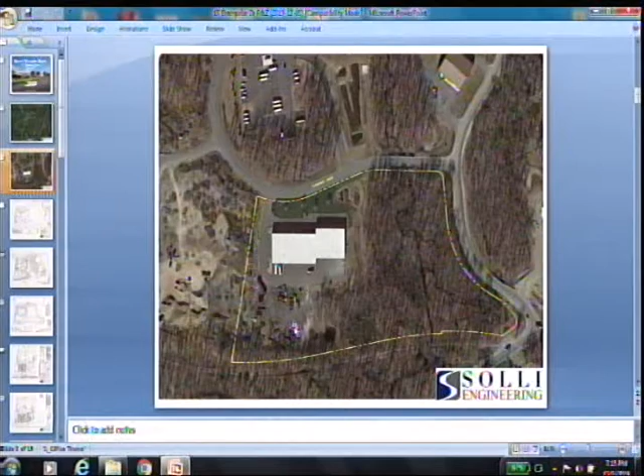This was the approved phase 1 site plan. What happened was that in 2006, the applicant never acquired a CO. So we went through this past year, past 6 months, tying up some loose ends left over from the original approval so that they can get a zoning permit and get a CO. We just completed that process, and the paperwork for the CO is going through town departments.

This was the approved plan from 2006. This is the original phase 1 building, and this is the phase 2 building shown back here. The parcel is 12.3 acres, and of that 5.1 are wetlands in this area. There's a conservation easement across the back.

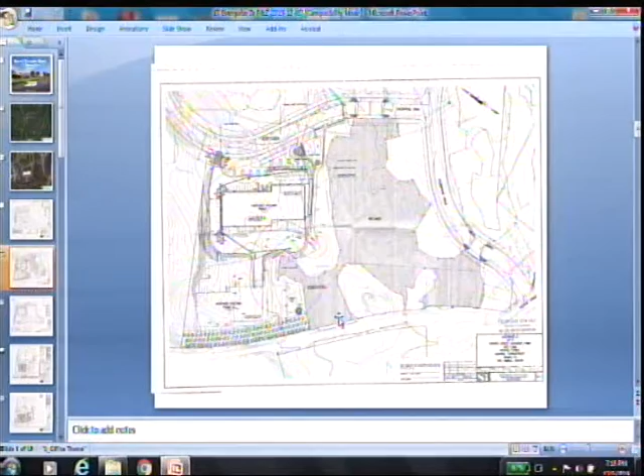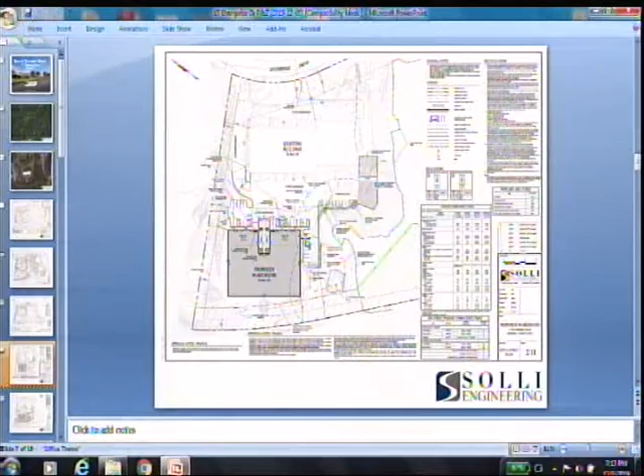This is our site survey, and this is our proposed site plan. It's a 28,440 square foot warehouse building. We're proposing 35 new parking spaces along the front and along the side. There are 2 truck loading bays in the front, depressed loading bays with a 4-foot lift at the end.

There's a proposed detention basin in this area with a retaining wall across the parking lot. Utilities will be stubbed in during phase 1 and tied in to the side of the building. There's a proposed outdoor storage area. The owner is allowed 20% of the square footage as outdoor storage, so he's allowed 6,000 square feet, and we're proposing 5,738 square feet. There's a dumpster for both buildings proposed in this area.

Since our original submission, at the time we submitted initially, we were in wetland review. We had a simultaneous wetland application, which we received subsequent approval on, on November 13th. Going through that approval, there were a number of different things that needed to change, fairly minor things changed as a result of the wetland permit.

Since the original submission, initially this outdoor storage area was not shown, it's been added. We had initially shown 7 parking spaces along the edge of this parking here. We've changed that to 8 because we made an error showing the parking required for the phase 1 building, so we needed 1 more parking space and added it here. We also added a location for a proposed monument sign in the front.

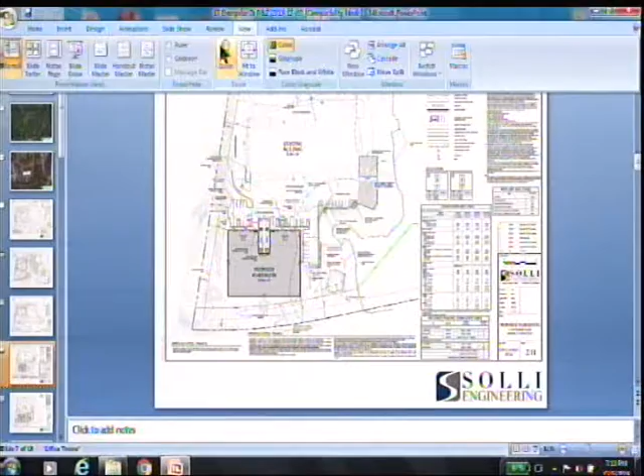We reversed the configuration of the accessible parking spaces in front of the building so that the space was not adjacent to a loading space. This is a loading dock, so it ramps down and is 4 feet below the first floor for a semi-truck. These are surface loading spaces with a roll-up door on the side for something like a van that can back in and unload directly to the first floor. We reversed the configuration of the accessible parking so it wasn't directly adjacent to the loading.

We also missed a couple of doors. We only showed one door initially in the front; we showed these 2 doors, but there's actually another door here and doors on the side that were added. So we slightly revised the grading in the front to accommodate access to those doors.

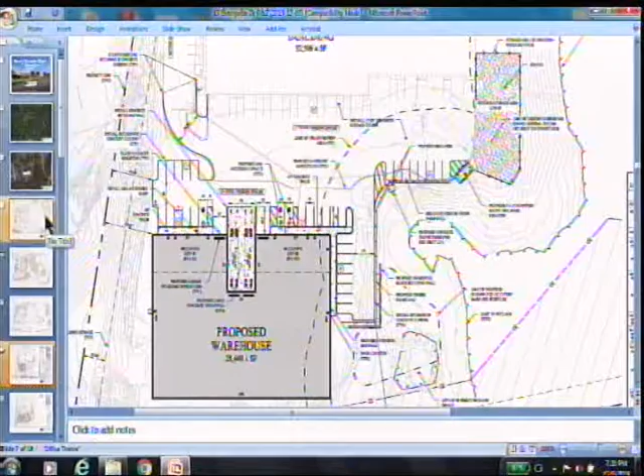Another thing that changed as a result of the wetland permit was the location of the outlet piping for the detention basin. Initially it came out over here, but it was too close to the edge of the wetland, so we moved it over to this place where we could put a level spreader in. We also rerouted the utility plan.

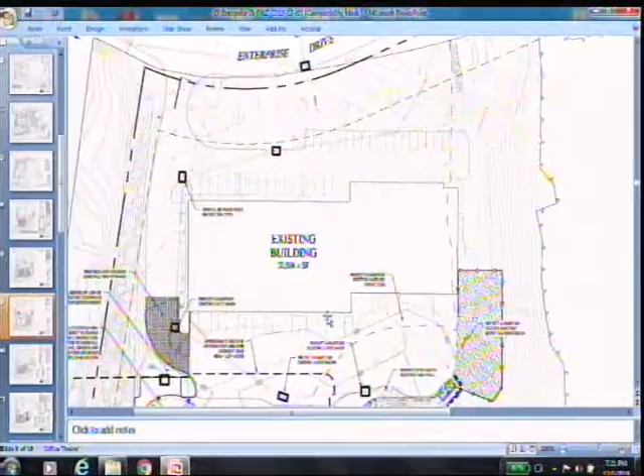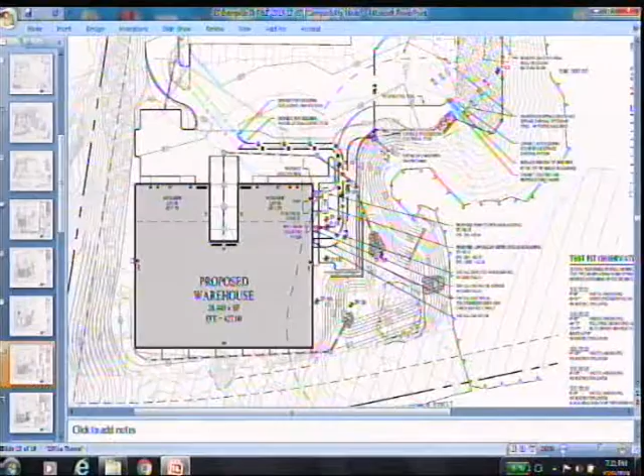We initially showed the utilities all stubbed up to this point, just off the existing pavement, going into the front of the building. But the mechanical room is going to be inside, so we changed the configuration so it enters the side. We added an electric transformer adjacent to the building. We initially thought it would go over the side where the existing one is for the phase 1 building, but it needs to go in this area closer to the building.

In the landscape plan, we added screening planting along the conservation easement. We added a couple of trees in the parking area, and we added some trees around the detention basin.

Excuse me, Russ, go ahead. Has this plan been submitted? Say it again — has that plan on the wall been submitted? No. Okay, no. When do you intend to submit? This week, in enough time to be reviewed by staff before the 9th. So that would have to be by 3 p.m. next Tuesday. We'll do that. And Tuesday, we will not look at it for the next meeting. Understood, you'll have it. Okay.

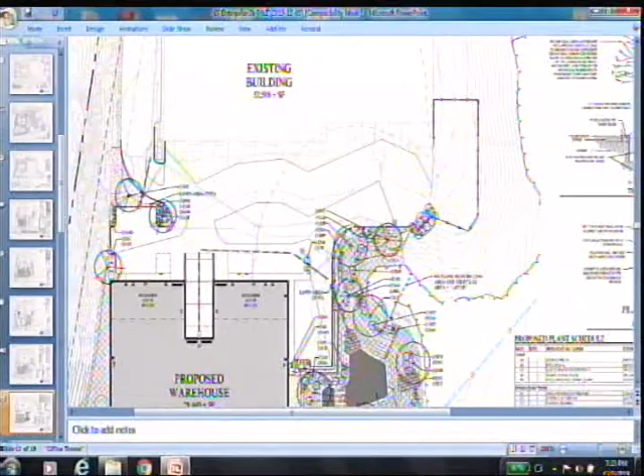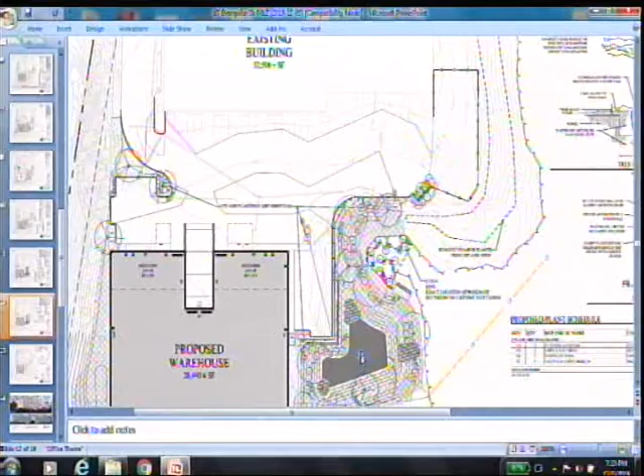So we have some additional planting that the wetland review required, and that was also asked for by planning staff. Additionally, on the wetland side, we received approval to fill an existing wetland pocket — it was a man-made wetland in here. To make up for that, we added some mitigation planting in the wetlands and along the edge of the wetland here, along with removal of invasive plants in this existing sediment basin.

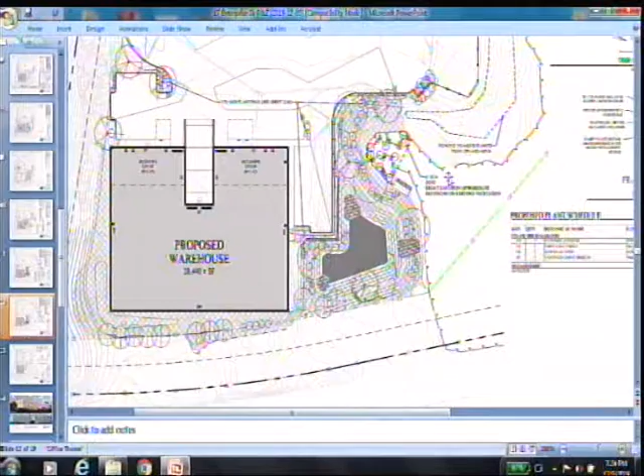So this is a completely new additional plan from what was originally submitted, with some minor modifications to the detention basin. We had a trash rack, we had the monument detail. Lighting is exactly the same.

This is a rendering of the building. Here's the parking in the front. This is the roll-up door for the surface loading, for the tractor trailers to back into the formal loading dock in the back. Doors at the front.

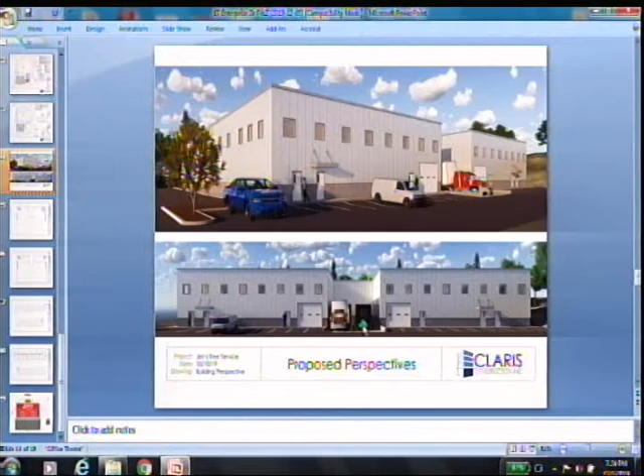These are the floor plans. Floor plans are unchanged since the original submission. And the monument sign to go in the front is shown, with details shown. So this is all in the submission that we're going to supply before 3 o'clock on Tuesday.

So we currently do not have a floor plan. Could you go back to the floor plan, please? Or the elevation? The floor plan was part of the original submission. The elevations, I mean. Oh, the elevation.

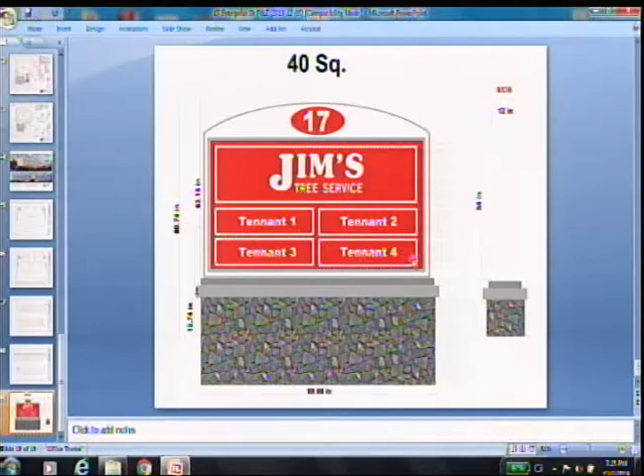You said you added some doors. So that's the east elevation, so this is the front, looking at the front, okay? On the side elevations, you have two doors, two pass doors there. This side is where the parking lot is, okay? And this is the other side, and this is the back.

But you have no walk from that door. This door, I guess it's the north side door? Oh yeah, we're showing a concrete pad. It's just an emergency access, just for egress, emergency egress. Not to be used ordinarily.

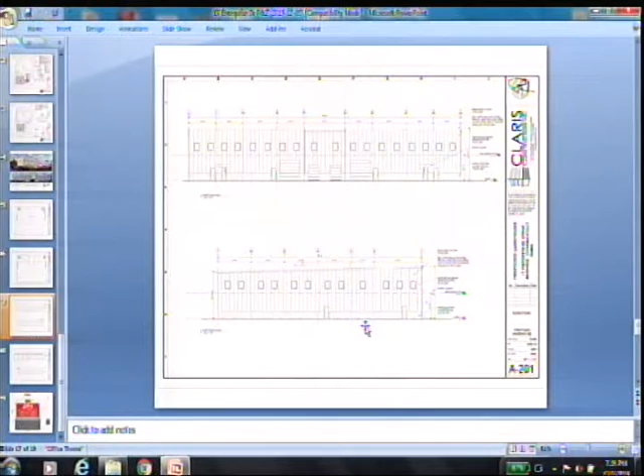During the original, or preliminary presentation that we were giving, it was shown that this building was going to be cut in half. That's correct. It's designed so that it can be 2 tenants. So that's going to be a secondary means of egress from there. There's three doors in the front.

Right, but what's your travel distance? I think you should consider a sidewalk from that side door out to the paved area. We could. Yeah, I don't believe it's required by code, but we can provide that. I'm not so sure about that, but that's for the building department.

So with that, I will open it up to questions. All right commissioners, seeing as the plan we have before us no one's even looked at, and they're going to be submitting new information, feel free to ask any questions now, but we will be asking questions again at our next meeting based on the revised and resubmitted drawings. So we'll start with you, Ron.

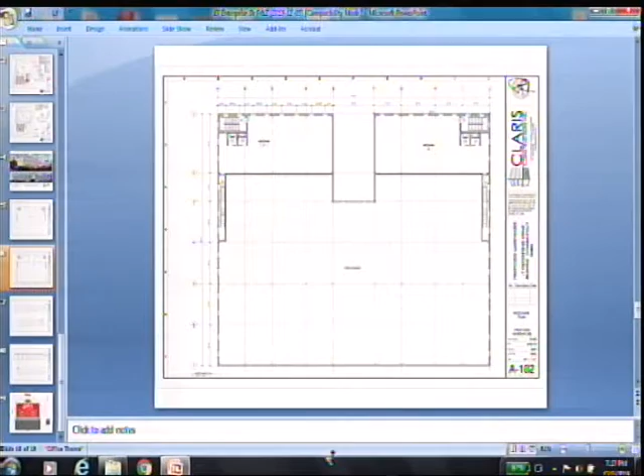Dominic? I have no question. So approximately, what is the height of the screen planting along the trail? I don't think we got that. You put it in the new plan. Let's see, just to look at my hard copy here. So those trees are Green Giant arborvitae with a height of 10 to 12 feet, and there's 8 of them.

And nothing's changed, the original plan was to tie into the existing septic system, that's still the plan going forward? That's correct. I neglected to mention that. So the original plan still states that the...

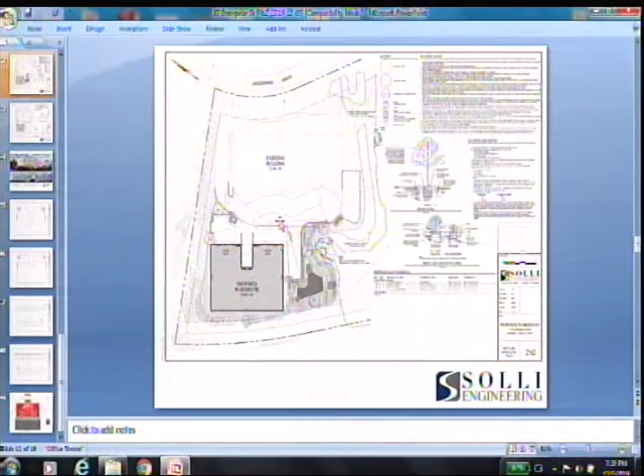So the original septic system for the existing building is located right here. And that was sized per health code for 0.1 gallons per day per square foot, so sized for a 3,000 gallon a day flow. There's 2 toilets in that whole building, it's got almost no flow, so it's tremendously oversized.

Given that, it was actually suggested to us by Rich Jackson, the sanitarian - we had intended to put another system down in this area, we did septic testing, soil testing, and the soils were terrible. It was actually suggested to us by the sanitarian to tie into that system because it's got so much capacity. It's called the central system, and it's permitted by the state health department, so we're in the process of going through that with the state. And it's a gravity-fed system at this point? It's pumped. So there's a septic tank, comes out, flows to a septic tank, to a pump station, and then there's a force main that runs up through here, connects into the leaching field.

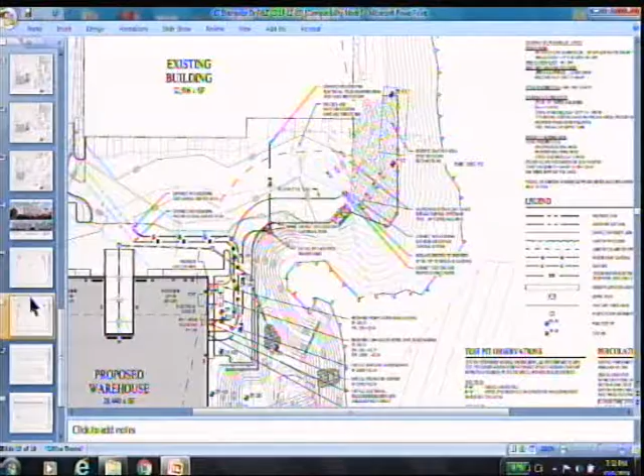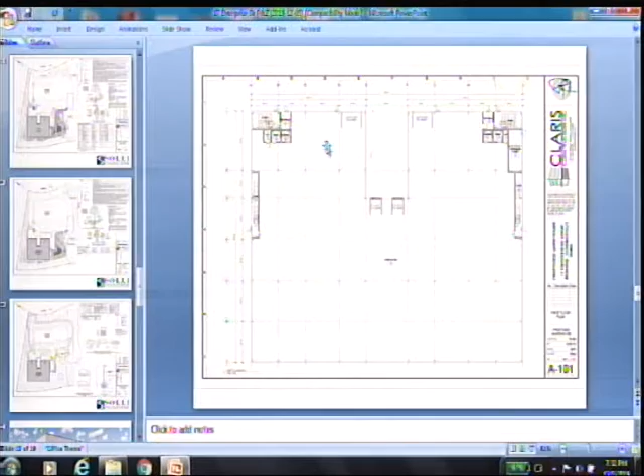How many bathrooms do you have in the other building, and how many in the new one proposed? It's 2, if I'm not mistaken. There's one here and there's one here, men's and women's, so there's 4. Is that the same as the other building? Yeah, pretty much, so there's 4 in the other building, not 2. I know the flows, I'm not sure how many, but it's probably 2, though it's got a couple hundred gallons a day as opposed to 3,000 gallons a day.

Back to the buffer trees, at the back along the trails, you're going to screen. Are you confident you're not going to be able to see the building from the rail to trail? Well, the building's taller than the trees, so you're going to see the top of it, yeah.

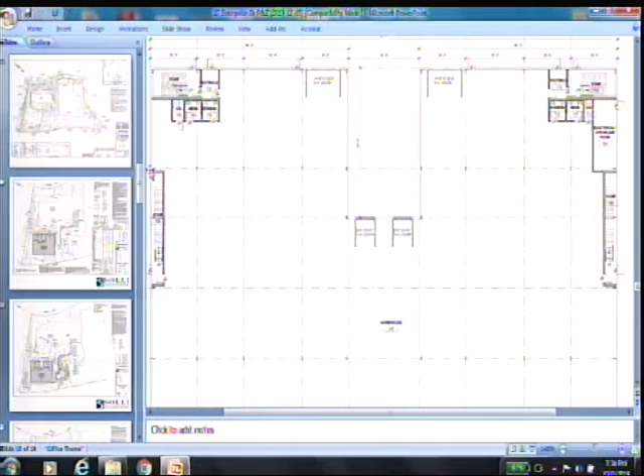I'm concerned about people seeing it, but also you've got a big, no-windows white canvas there abutting people walking up through the woods. I'd hate for that to become graffiti or something on the side of it. Well, I can't speak to that, but if it's very visible from the rail to trail...

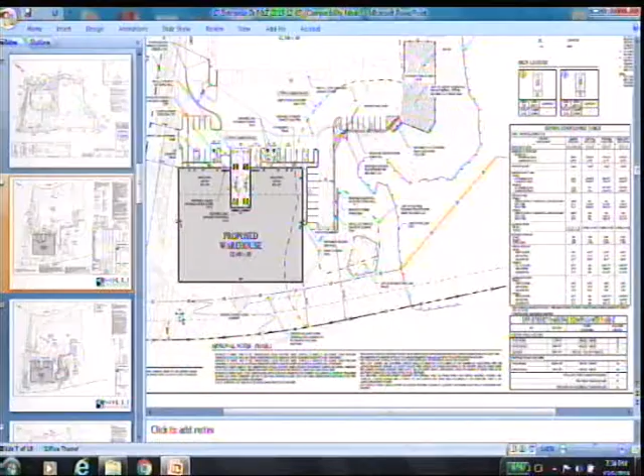The rail trail's down here, right? There's a 50-foot conservation easement, which is pretty heavily wooded, so they've got to cross through the conservation easement up a hill. You're putting in screening, trees in a solid row along the edge? You're not going to be able to hide the building, but those arborvitae also grow over the course of time.

I don't think they're gonna go 40 feet. Not sure how good they're gonna do back behind the building next to trees, with no sun.

I'm gonna put solar panels on those trees to help them grow. Not sure that's how it works, but good idea.

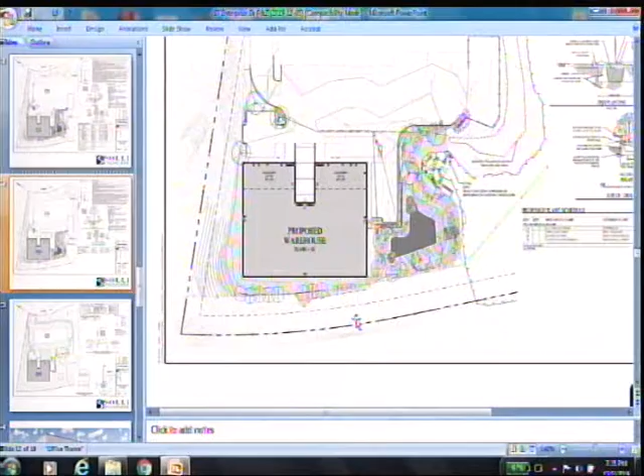All right, that's my only question for now. Mike, I asked for a copy of the conservation easement. It's been filed on the land records, along with a map. I don't have it on me. Could you make one available to us for the next meeting? Sure, make it part of your submission, please.

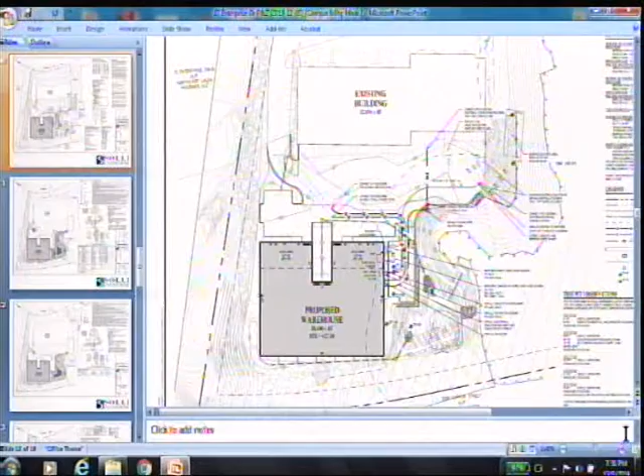Let me see what it is. So the wetland permit required that this be paved. We were originally going to have it gravel, so that precipitation seeps into the ground and there's no runoff, but the Wetland Commission required this be paved.

It doesn't seep in, and it's going to be filled with dumpsters anyway, so the water's going to go somewhere. Our regulations call for outdoor storage areas to be paved. If inland wetlands is requiring it to be paved, and zoning regulations require it to be paved, I think you pretty much have your answer for what you need to do there.

But is that still going to affect your grading, whether it's paved or not? What I was looking at is if we pitch it back to the parking lot, we'd have 4 feet of fill at this corner. It's a 4-on-1 slope. I took a look, and it's possible the grade comes down and meets grade before the edge of the wetland, but I'm not sure what that would do to our wetland permit.

It's going to require you to go back, that's why I'm raising the point now. The other thing I was looking at, and I talked to Scott about this, is that in lieu of pitching it back, we could grade it down and have it collect to a storm system that would go to an infiltration.

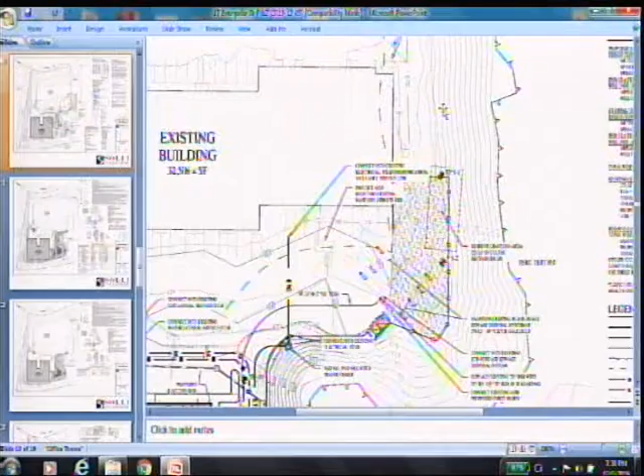I don't remember talking about that. But if you did that, how's that going to affect your septic system? Well, septic systems are remote from that, that's your reserve area. The septic system's way over here, it'll be over here.

Between that storage area and the added sidewalk, you would need to change your drainage calculations again because you're increasing runoff. Well, I'm thinking this could be an infiltration. You'd have to go back to the wetlands commission for that. But how are you going to put a catch basin and a pipe in your reserve area?

You can slope this down and have a curb. Right, but that's your septic reserve area. Which is part and parcel with getting more information from the health department on the adequacy of that system, that's not gonna work digging into that. We have some work to do on this.

It'll be addressed by Tuesday, hopefully. Anything else, staff?

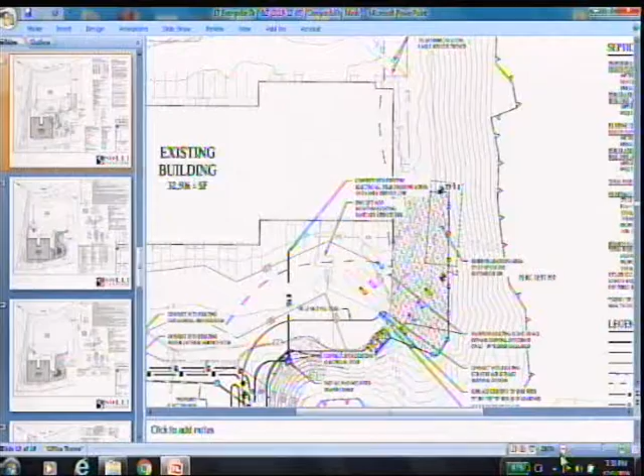There's no sense spending a lot of time going through a bunch of comments if plans are changing. That's fine, I just want to highlight those things so I want to make sure they deal with them before we come back again, so we don't have to say the same thing. I've been in contact with him, so I'll continue to work with him.

Now let's see if there's any public input, since it is a public hearing. Is there anyone in the audience who would like to speak in favor of this application? Is there anyone who would like to speak in opposition? Anyone have any general questions or comments?

Okay, Mr. Seer, back to you. And that I conclude, and we will resubmit revised plans based on comments that we received this week, on Tuesday. Anybody have any last questions before we adjourn this hearing?

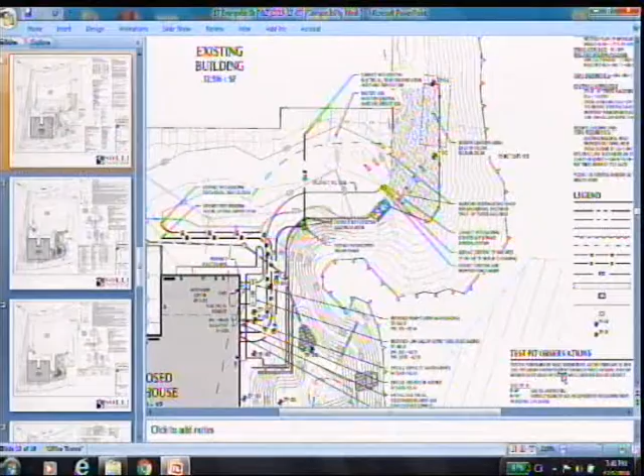With regards to schedule, are you confident you'll be able to deal with the health department, inland wetlands, and all the other issues by next Tuesday? In two weeks? No, really, you have until next Tuesday to get the plans in. Correct, but for a hearing, this hearing's continued until the 19th.

Right, two weeks from today? Correct. And at that point, can we get another extension beyond that? You can, but I'm just saying I'd rather you do a good job than a rush job.

Right. Why don't we continue it to the 19th? If you find that by next Tuesday you're just not going to have everything that's needed, let staff know, and we'll push it out to the first meeting in January. I'd rather do that than have you come and then have to come back again anyway.

The wild card is the outdoor storage area. I'm talking to the owner about it. The owner just had a knee replacement, and he's been out of pocket. Next Tuesday, just want to be clear on that. That's the main issue right now, the outdoor storage.

Now, where do we stand on time, Will? We have to, on our clock, November 28th, and obviously we've already passed that. So we used 8 days of extension to get here, so they have another 57 days left to give us, which is a couple months. They need to, it's an extension verbally right now which is going to get followed up with a letter, but there's plenty of time if we need to go into January. So what was it, 57 days you said? You have 57 days left to grant us, from today.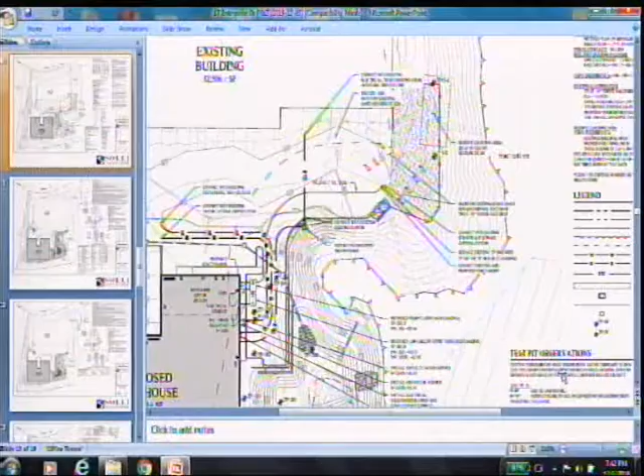Next up, item number 8, EFP 2019-02, file number 103, 7 and 15 Main Street, B1 District, excavation fill permit application for the excavation, removal, and export of approximately 64,200 cubic yards of excavated materials off-site to 4 Main Street, companion application EFP 2019-03, file number 104, located across the street, including general site preparation work for future potential development. 1-15 Main Street, Monroe LLC, owner applicant. This is reconvened from November 7th, 2019.

Good evening. My name is Larry LaPere, I am a licensed engineer in the state of Connecticut. I work for Solli Engineering, we have offices at 501 Main Street here in Monroe. Tonight I'm representing the applicant, 115 Main Street LLC, for this application for excavation and fill permit. You do not have it. We did have the beginning of a public hearing about a month ago. You do not have any updated plans.

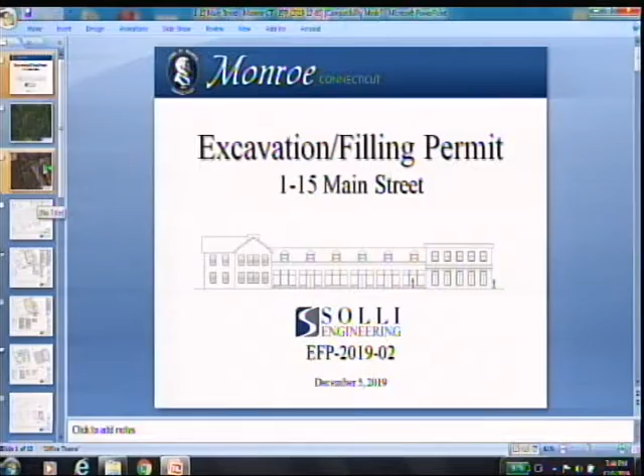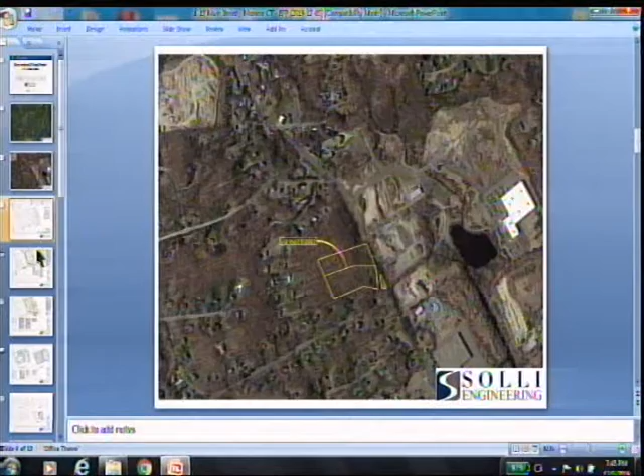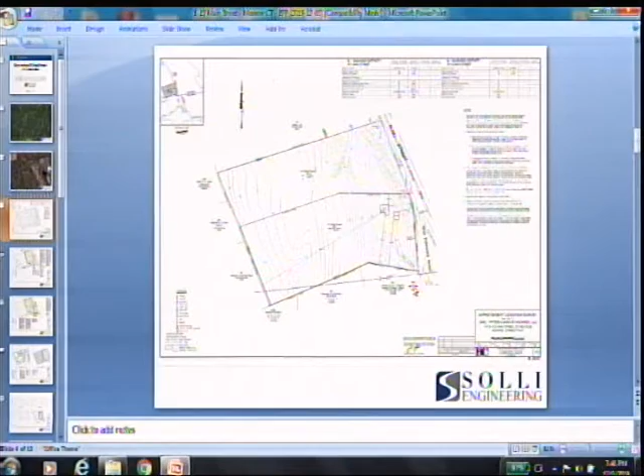There have been some modifications, again, based on some of the comments that have been made previously.

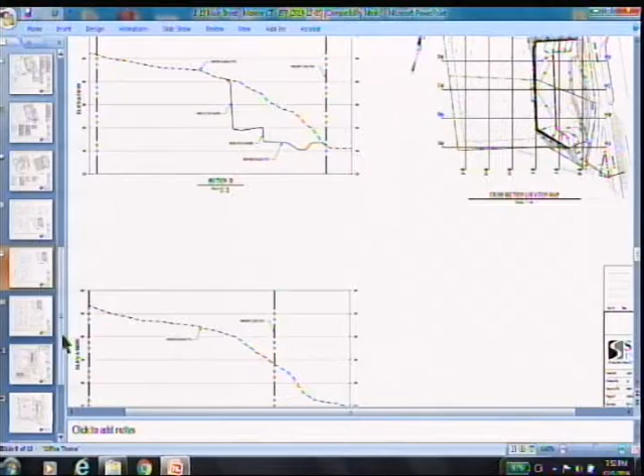If we look at the cross sections, I think that's cross-section J. Here is cross-section J, which is in here, right? It's right through the middle of our site, and then it goes north to this site here. What you see is this site has been cut down, right? This is a rock cut to approximately this elevation, which is where the road grade is. We're attempting to do the similar thing on our site.

In order to get a more appropriate development in terms of the development potential for the whole site, it's 6.5 acres, and if we had to restrict it to the building envelope you're talking about, it would severely reduce the capabilities of the site in terms of development potential. So we're just asking for the same kinds of things that we've done elsewhere in town on this site. It happens to be a lot of cut, I understand that.

There are deep cuts and there's a lot of material coming out, but that's what the proposal is for. The sites in the north didn't have all that much cut. That site has historically been the way it was. There was mostly a building on the south end of that property. They did not do a cut there when they did the current project.

Maybe not, but somewhere along the line there's a rock cut here. There used to be a building right there, and there still is. Well, at some point it was cut, is what I'm saying. Yeah, but that predates my time, maybe 60, 70, 80 years ago, but there was no cut made in that area for the current project. I'm just saying this particular project with these cuts is in keeping with what's going on in the same kind of thing in the neighborhood, or has happened in the past.

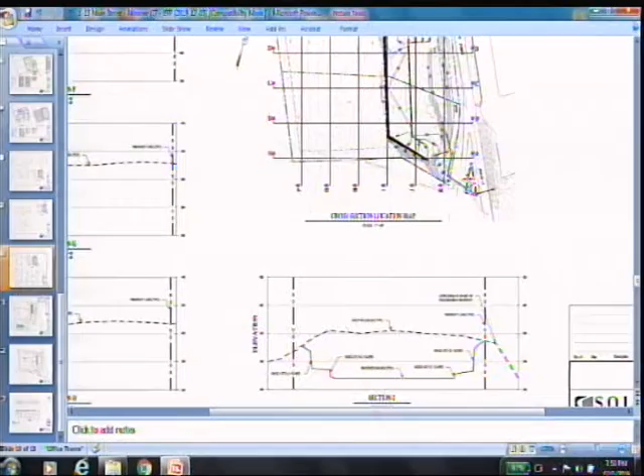Let me see if I can get closer here, is this easy to see, this radius here? Maybe on the wrong plan. Let me see if I can get a better plan. This one? No, one above it.

Right, so here we are. We're perpendicular at the town line, and we're gonna put a radius on and go out here. So yeah, I think we can accomplish that without going into trouble. Traffic control would obviously spill over, so there's gonna be some involvement with that.

Yeah, for sure. And here's the thing, we're in the road right-of-way here, where we're making the joint with the adjacent roadway, that's road right-of-way. So I don't foresee an issue in staying on the property that is here.

I think at some point down the road, this area here would need to be abandoned from a road standpoint, discontinued, what have you. And I don't know where the property line would eventually wind up, but I can see that we could swap this part for this part of the road. I don't think that affects the plan so much, because it's just another approval you have to get by town council. Right, I think there's certainly some issues here that need to be resolved.

We have another one, procedurally. You're adding a parcel into the work, and that wasn't part of our noticing requirements. So I'm going to have to talk to land use counsel about that.

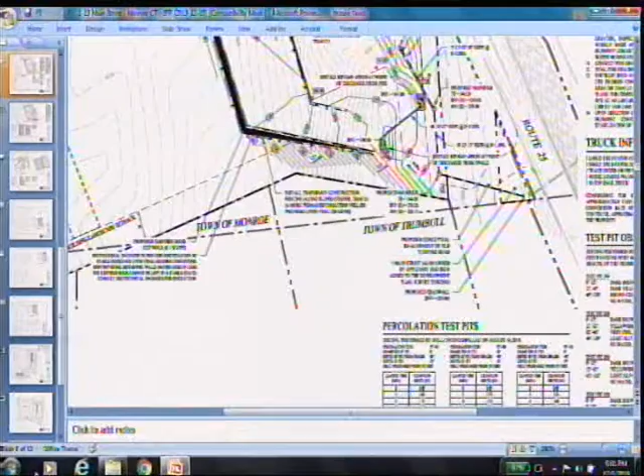So that's the proposal. Scott had mentioned cutting a road up here to access what was originally our septic area, up on the west end of the site at the top of the hill. I think it was your comment, Scott, asking us to grade to see if we could get up there. We took a look at it, and it turns out there's probably 30 to 35,000 yards of material that would have to come out to get a road all the way up here. It was a massive cut.

The owner did not want to do that. It really puts a gash into the middle of the property that they didn't want. So what I was talking about was an access way into the upper table of the cut you're proposing, in the area between the basin and the toe of slope, or the exposed wall. Because you're going to have to go in there to maintain things, there needs to be a driveway down on the south end of your cut to get in there to maintain it once you have a finished product.

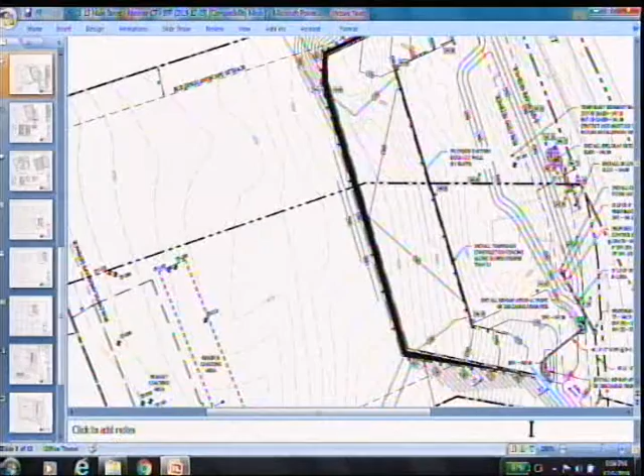I was really talking about, and it might be—I didn't look at the grading real close—but I was talking about in front of that area. Regardless of where it is, the issue really comes down to what kind of grade it has to have. Because if it needs a slighter grade, then why can't you just build a driveway up to the top, and use the top for building?

Yeah, well, I was saying it needs a driveway here that comes into this flat area. So you can exit here—if you come in here, at these grades, you can drive to here. You can also drive up here, right? So what are you proposing to leave it as—gravel, grass?

Well, you say leave, but prepare for our eventual site plan, right? We're hoping the site plan gets approved prior to the finish of this cut. But this application isn't looking at the future—it's looking at what you want to do right now. You're going to grade it, and it's going to have a finished product, and as far as we're concerned that finished product could last 20, 30 years. So we want to make sure it's left in a condition that's maintainable.

Here's what the plan indicates—we have a restoration plan. The final aspect of this, since this is mostly rock cut, is that this whole area will have 6 inches of topsoil on top of it and grass, if it does not proceed to site plan. So if for some reason the site plan doesn't go forward, the restoration plan would finalize the site with these grades, assuming they get that far, which I assume they might.

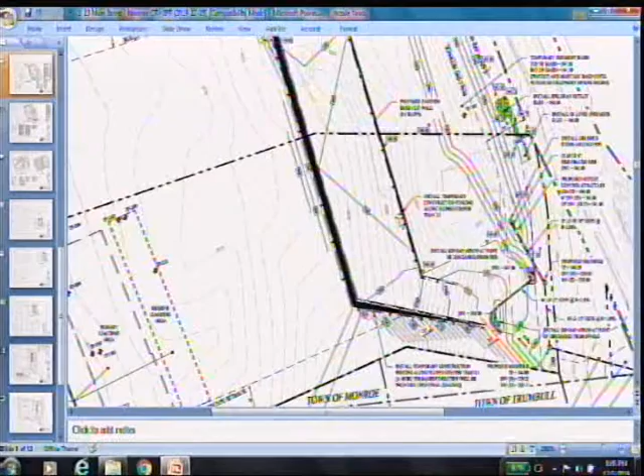So one of two things will happen: either the restoration plan will be enacted, and you'd have 6 inches of topsoil everywhere with seeding and grass—a nice looking shelf you could play soccer on—or it would be our site plan, whatever that is. So it's one or the other, but these plans assume there's a site plan, right? I think I've shown this to you. So this is really what we'd like to do. So again, how do you get to maintain that septic system, even once you've built that?

Well, there was one thing we tried, taking a road through here, but we didn't like that, so we're looking at other options. One of the options we just talked about is the possibility of coming up here with a road that is not an 8% grade road.

There are some other options we're exploring, one is to see if we can gain easement access from any of the adjacent property owners. That's another option. It's residential, though, and not allowed under zoning - you can't access a commercial property from a residential district other than by a public street.

There is another possibility of obtaining some other land we could go through that is not in a residential zone, so we're exploring those options. That will also be resolved by the time we send you updated plans for review, which we're hoping will be next week if we can get the survey stuff resolved.

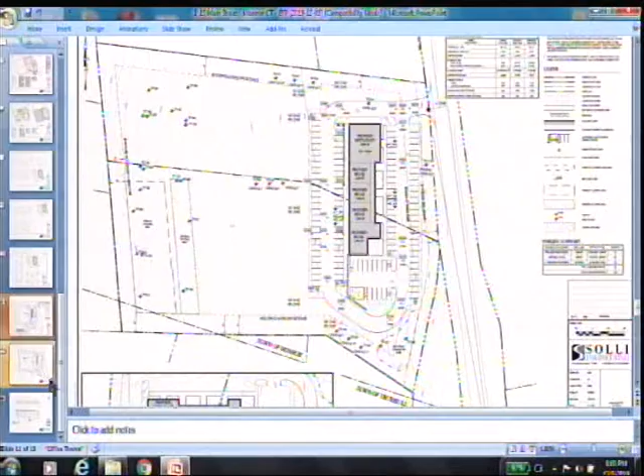Yes, so that's the developable area if we do not get any waivers for grading adjacent to our property. So that's the best you could do then, right? I mean, I wasn't really following your argument why you didn't want to do this - you couldn't fit the building and parking in there?

Can't do - underneath here is what we plan to do, and if we can't grade outside of this envelope, then we can't do that plan. No, and there's not enough square footage there to reconfigure the parking in the building. It just doesn't work - it would be a smaller building.

You can't move that westerly line back more towards the property line? That's as far as this one? The one on the west side - that one, you can't move that back more? No, we probably could, we stopped it here because we don't want to get here. But you could move it back more and thereby create more usable land while maintaining the regulations for slopes?

You could - again, remember, we have a serious challenge here with grade. That's a big cut. One of the reasons the roadway going up here was so, I'll call it ugly, was that we were still in 30-foot cuts up in here. So we're trying to minimize the amount of disturbance to the site while still getting what amounts to a viable project for us.

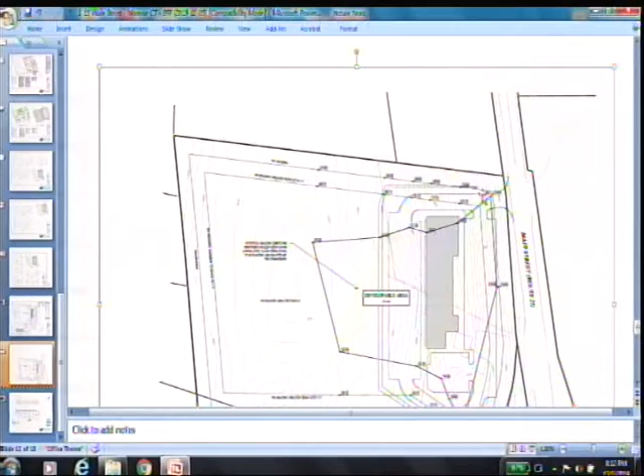If you look at the cross-section we looked at a minute ago... here it is. This is just a hill at this point, a 15 or 18-foot high hill, that doesn't need to be there.

The reason we have these setbacks for changing grade is because of the impact your development would have on the neighboring property. So if you're making a deal with your neighbor and you get rid of that knob...

I think the commission would be very amenable to waiving regulations on that property line. I appreciate that, and in fact section J is one of the discussion items I want to have for exactly that reason.

You see the elevation in this area is lower, so there's still a little knob here so folks over here can't really see what's going on. Yes, they don't see the top of this hill like they used to, but this whole area is kind of shielded from them sight-wise. So both neighbors on either side are somewhat shielded from visual impacts.

We'd love to be able to get rid of this, I think. I just don't know, you're dealing with a neighbor, I don't know what it is, whether or not it wouldn't hurt to ask. It wouldn't hurt to ask. No, not at all, I agree. We'd be happy to pursue it.

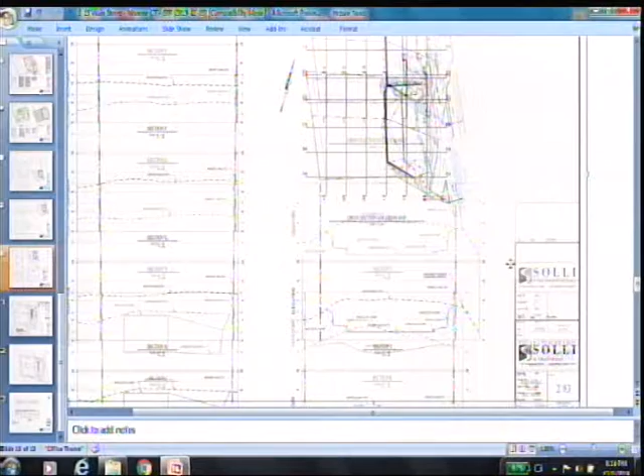So that's our proposal. Again, happy to answer any other questions. Okay, thank you, I'm done with that. Staff, have anything for right now?

My real concern at the moment, time-wise, is the noticing issue. Because we're not going to be able to cure that by the next meeting, for sure. Likely not, I would agree.

I mean, what are the... I don't know how this impacts it, because we have a clock that's running. Will that reset the clock? Do you have to withdraw and resubmit? I don't know, those are questions I've got to ask the counsel. Okay, yeah, I'd like to help you answer that in any way I can.

All right, let's see if there's anyone from the public that wants to weigh in. Is there anyone here that would like to speak in favor of this application? Anyone who would like to speak in opposition? Any general questions or comments?

Back to you, thank you, that's our presentation. We know that we cannot close the public hearing, we don't want to close the public hearing, because we need to put some other data in, so we would request that it be extended at least until the next meeting.

Is it the 18th or 19th? The 19th is our next meeting. But given the timing, you have to give us the extension. We have till the 12th. Because you need to give the extension past the 12th.

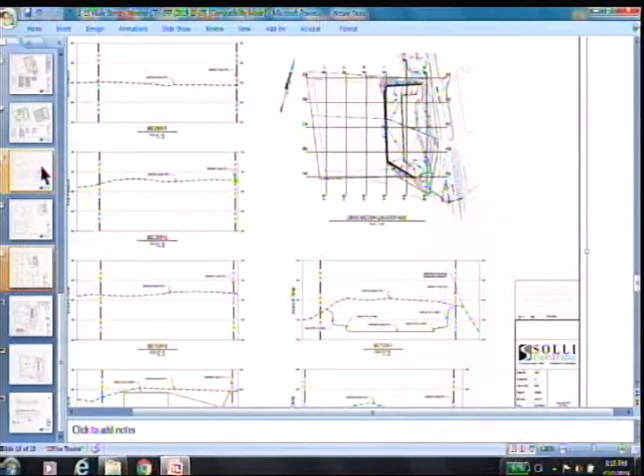So you're going to acknowledge that tonight verbally, correct? Just, could you repeat that, and I'd be happy to. The commission has till December 12th under their clock. Oh, okay, so after the 12th we're on your time. So you actually are... would be granting us an extension to get to the 19th.

What happens if you don't grant us an extension? Well, it doesn't matter, I'm gonna... We will have to close this hearing tonight and vote on the information we have, and everybody goes home. I would be happy to grant the board an extension to extend the public hearing beyond December 12th.

So beyond that, we'll deal with the noticing issue in the coming days, and we'll also find out what additional extension is needed. Would you like to continue this to December 19th or January 2nd? Let's say December 19th, and we'll see over the next couple of days what we do, but we'll get in touch with you if for some reason the 19th doesn't work out. Okay, I appreciate that, thank you. Continue to the 19th.

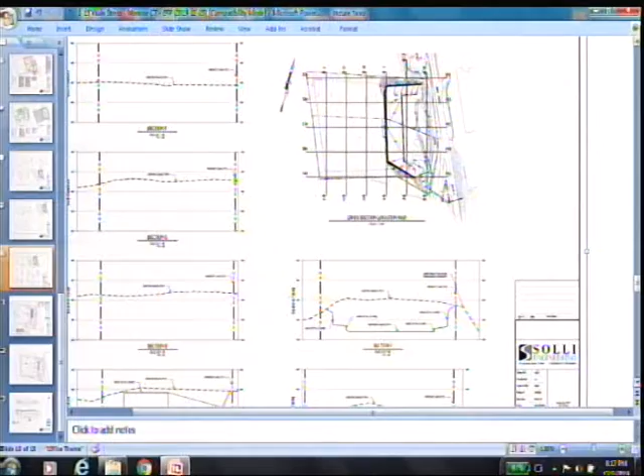8:16 PM. Oh, we got two. All right, next up.

Item number 9, EFP 2019-03, file number 104, 4 Main Street, B1 and I1 districts. Excavation fill permit application to import approximately 64,200 cubic yards of excavated fill material from 7 and 15 Main Street. Companion application EFP 2019-02, file number 103, located across the street, to fill the site to an average elevation of approximately 322 feet, including general site preparation work for future potential development. 7192 Main Street LLC, owner applicant, and this is reconvened from our November 7th, 2019 meeting.

Will, what do you have? Exhibit 9, notice from application to Trumbull Planning and Zoning Commission. Exhibit 10, response to ART comments. Exhibit 11, updated engineering report summary by the applicant. Exhibit 12, excavating fill permit progress report, draft plan form by the applicant. Exhibit 13, waiver request letter from applicant. Exhibit 14, updated engineering report by the applicant. Exhibit 15, updated plan set by the applicant. Exhibit 16, ART engineering comments. Exhibit 17, ART health department comments, and Exhibit 18, ART planning and zoning comments. That is all.

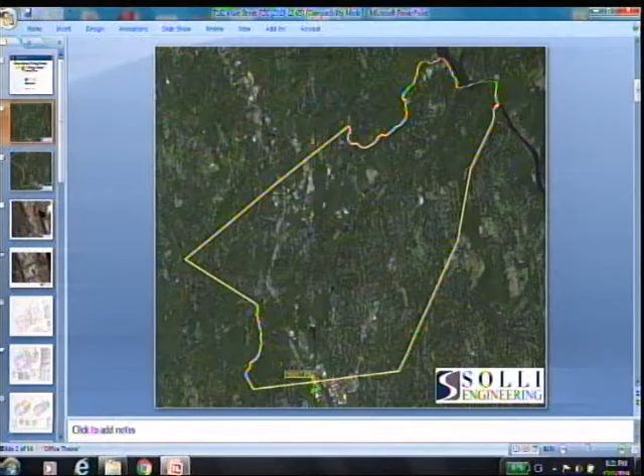Okay, so we represent actually a different client here. This is 7180 Main Street LLC, and so this is the site across the street that I was talking about a little while ago. We're in the same general area here, down near Monroe. Here we're down on Main Street, right at the Trumbull line. This is the site right here, right on the line. A good portion of this building is in Trumbull.

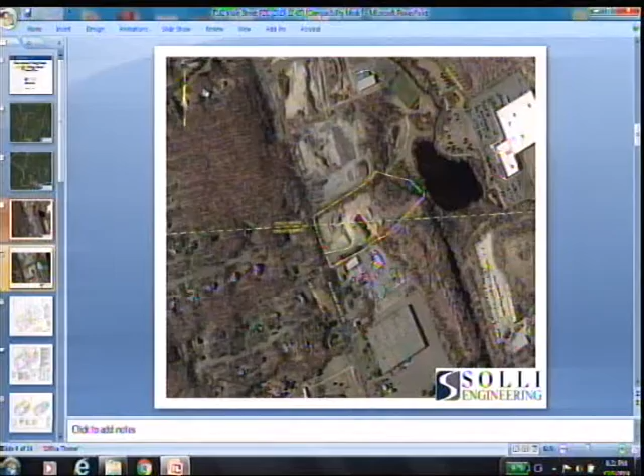We have been to Trumbull because we need to process both wetlands and planning and zoning in both towns. We've been to Trumbull planning and zoning, and we'll meet them again at the end of this month, or the 19th, or maybe the 18th, sorry. And we got wetlands approval earlier this week—they did give us an approval for the wetland stuff. Now, this site—from Trumbull or Monroe? In Trumbull, sorry, in Trumbull.

So the board may be familiar with some aspects of this site in that this area here is currently, as we speak, part of 5 Victoria Drive.

There is a land transfer in process now, and just today the Mylars were signed by both owners. We'd anticipate filing that Monday. It's going from my office to Chris's office, and I think he'll handle it from there, so you should get it within the next day or two. But it is signed and moving forward, so we're hopeful that will be resolved by next week.

So, 5 Victoria — there were some wetlands issues in the past, and an area here was deemed to be remediated. Because of litigation between the owners of the two lots, not the current owner of this lot, the wetlands remediation was deferred until some future date, though I don't think it was a clearly defined date. The new owner has taken on those obligations.

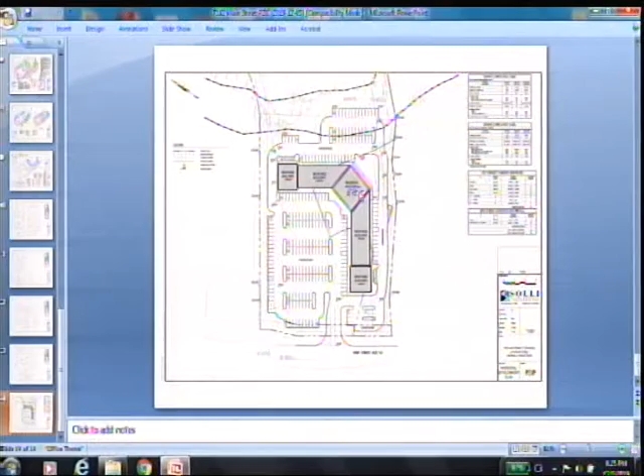In order to accomplish that, we would have this grading plan. We're filling the central areas of the site. We have erosion control features on either end, where drainage comes down through check dams and eventually goes into our sedimentation pond. Both sides of the site will have drainage swales with check dams.

The area here near the wetlands — this dashed line — is the 100-year floodplain according to topography, based on the 100-year flood elevation of 298.4, per our existing topography. Also in here, not as obvious, is the FEMA flood line, which comes in from the FEMA FIRM map, that little dashed line, then comes up and goes in this direction. So there's fairly good correlation between the existing FEMA FIRM line and the topographic interpretation of the flood limits.

So we're working from the topographic interpretation of the flood limits, but the elevation we're looking for is 280. Yes, but I had asked for — the floodplain location is really the contours that were there before it was filled, before it was disturbed.

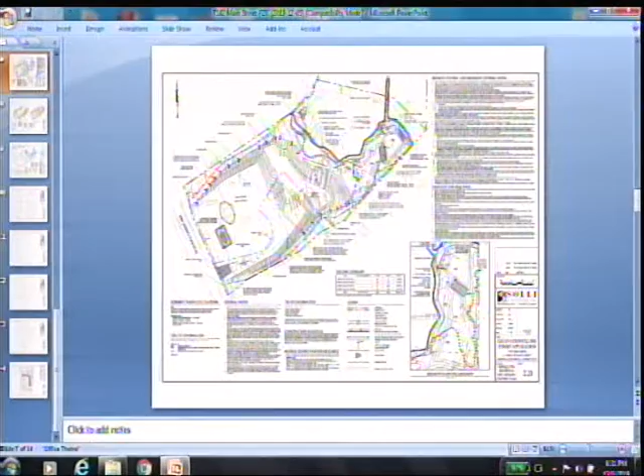In any case, I think we do need to go look at this and iron this out, because this is an issue, because what we're planning on doing here—let's see if I can get a cross section.

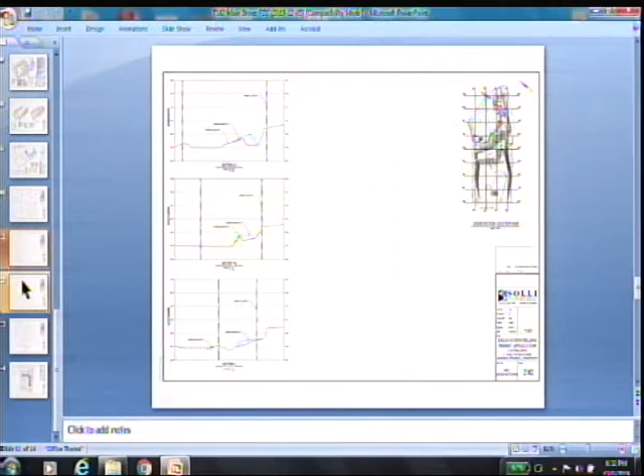Is that not it? And by the way, the disturbance to the property was happening subsequent to 2006, because that's when I came here, and I went out to that property and witnessed the filling happening at that point. So not only did it happen before that, but it happened after 2006, with no permit.

And so you can't have it both ways, unfortunately. You can't say, well, they used to allow that, and that's what we did—but you didn't, it was the previous owner, but they never got a permit to do it, and they did it after 2006. So, I'm just trying to get on the same page with you so we can get something new to take a look at. Were they ever issued a violation?

They were issued a violation, and it took this long because the violation was processed through the Wetlands Commission. They posted a bond because they said the neighbor, the predecessor to your client, was in violation and they had a civil issue, so they were going to court to address it. They asked Wetlands if they could defer, and the commission agreed to give us a bond while they worked out their civil issue. Now that's resolved, so we're here today to resolve the wetland issue.

But along with that is the floodplain issue too, we've got to resolve. There's a cross-section that runs through this area - we've changed orientations here, I apologize. This is the area we're talking about, and this cross-section goes right through it.

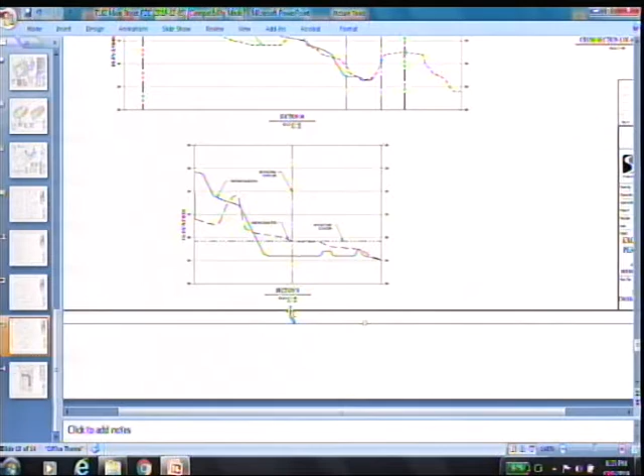Obviously the stuff below it - this is the sedimentation pond - so the area below this berm may be filled with water when the flood comes along. Likely will be filled with water, so it's not available for compensating storage. The several feet above it is, where it wasn't before. So I wanted to let everyone know there's an enhancement here as part of our proposal to increase the amount of flood storage capacity in that area.

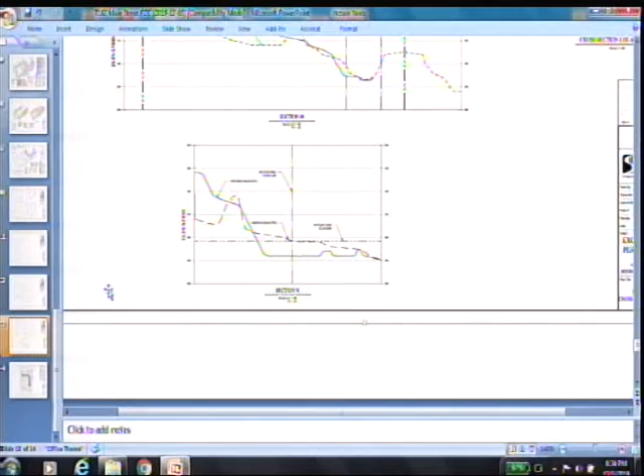Okay, so I do think we're going to need to... Which end is the developed part of the site? Up here. We are looking now - on your left is west, on your right is east.

This is the river - down in this area is the river that's causing all that flooding. So again, we have asked for waivers here as well, the same 4 sections of the code, in order to accomplish the fill operations. This is obviously opposite the one across the street - this is all fill operation.

And so there's our proposal: basically 2 things - fill the 80,000 yards or 60,000 yards, and do the wetland enhancements that were part of that whole thing that went on for years and years. And I'd be happy to answer questions.

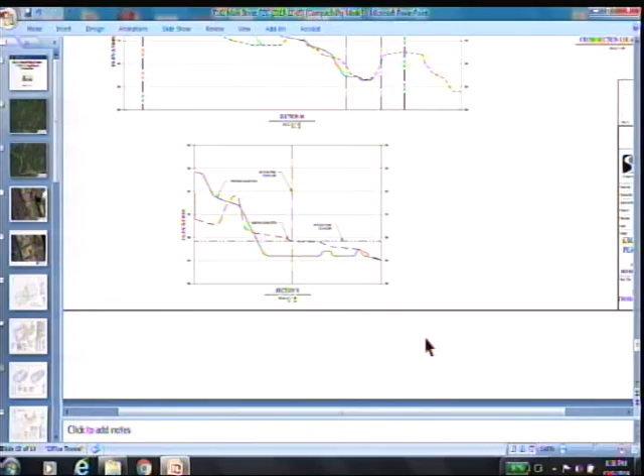Ron? I'm okay, I'm okay. No questions. No questions? So you're gonna get back with Scott?

Yes, I think Scott and I are going to have some in-depth discussions on the engineering comments. All right, so then I'll hold my questions until after that. Okay, I will do the same. Staff, anything else? Well, I think both Scott and I have memos on this that I actually have to go over tonight, but those are things that need to be addressed.

Anybody from the public who would like to speak in favor of this application? Anyone would like to speak in opposition? Any general questions or comments?

We're all set. Again, please don't close the public hearing, and we'll let you know by next Tuesday if the 19th works. If not, we'll defer till January, and we will get the documentation on extension. Wetlands when again? Wetlands is the 11th, next Wednesday. So you're not going to wetlands until after the deadline for submission?

Yeah, well this has to be continued to the 2nd, because we're not gonna have the wetland stuff before the cutoff. And I think wetlands is just like you, they need their stuff ahead of time too. So if we know that they're revising it some more... I think the stuff for wetlands is in already. Yeah, she's reviewing today. So we'll continue this to January 2nd.

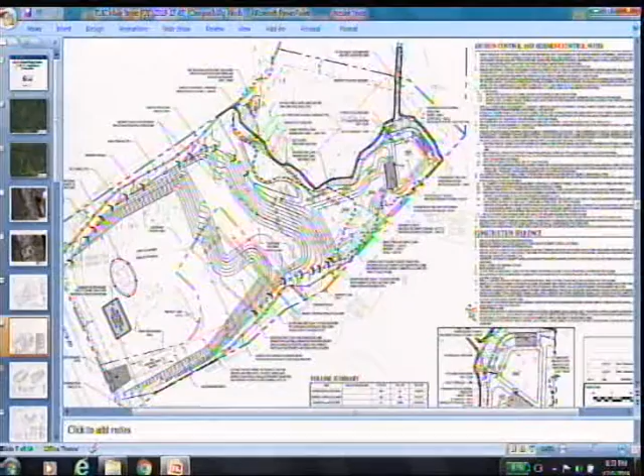Just started. Right with it. All right, moving on.

Site plan review and permit amendment modifications. Item number 10, we have nothing. Item number 11, time extensions, none. Item 12, bond releases or reductions. First up is SEP 2018-02, file number 15978, 160 Shelton Road, $2,500 full release, Sound the Trumpet Baptist Church.

Mr. Vargas? As you remember, the last time it was on, the owner was not here. And we wanted him to come because there's a unique situation in which there was an approval for renovations to the existing building to accommodate a church. They started the work, but they have since no longer are pursuing that, they're no longer his tenant. But there are pieces of the work that are in flux, and other things with the landscaping that happened that are gone, but since he doesn't have them to do what they were supposed to do, we wanted to talk to him. Can you state your name and address for the record, please?

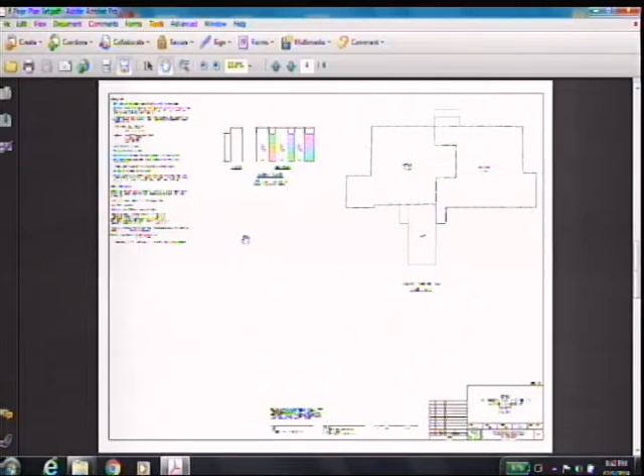Well, you have to understand, when the church went in, they took all the lights off. Well, there is a plan for what lights were supposed to be on there. Well, that's why they took them off, because they were gonna put new lights on, but then they - I know, but you should follow that plan. If not, you have to come and amend that plan. But it sounds like you kind of did something different altogether.

Yeah, but what we did is we put the lights back in the original locations, the lights that were there before, and we just made them motion detectors. Yeah, but we don't know what they are. They may be fine. You really should have come in - you need an electrical permit for that as well. To change light fixtures? If you just change the fixture, I don't think we need a permit for that.

So he just put the fixtures back up that the church took down, and I upgraded them by doing motion detectors. Are they floodlights? They're all motion - well, motion just means they go on and off. No, the new bulbs, what do you call, LED? Yeah, they're all LEDs. Is it downlit or is it a floodlight?

They're floodlights pointing down into the driveway. Yeah, see, those aren't what would have been approved. But it might have been what was there originally. Maybe, don't know, they took them down.

Doesn't matter now. So there's no parking striping, right? That hasn't happened yet? No, I didn't do it because we only have 6 cars there. We have a tenant that has 4 people that work there, and it's just myself, and usually I'm across the street at the golf course. I have one bookkeeper, so there's so much extra parking there. My bookkeeper only works from 9 to 1 and goes home, so we're down to 5 cars. It's kind of overkill at this point.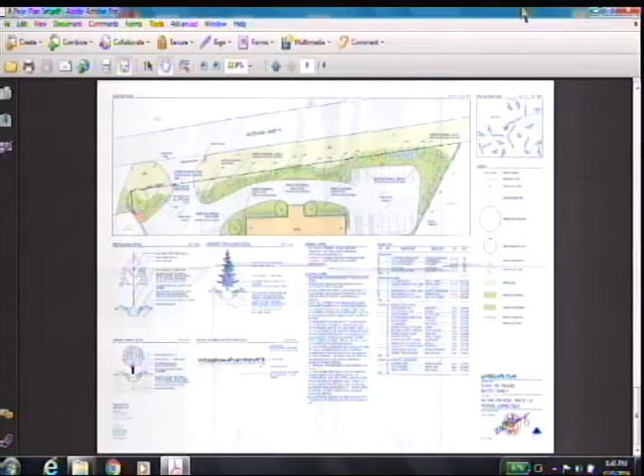All right, next up, SDP 2014-01, file number 101, and 13-3-SCP, file number 1520A, 406 Main Street, $2,500 full release. This is the property, it's an old greenhouse, owned by Ray Ganem. It's next to the Monument Store and across from Vazzi's. He was supposed to finish the work, but he's finished the work.

Oh, is this the one that used to be a funeral home years ago? Isn't it an ice cream place? Maybe it was an ice cream place.

Ice cream, I think it was, next to the Monument Store. Downstairs is empty now, apartment upstairs. Forty years ago it was a funeral home, then an ice cream place called Twisted Taste, before your time. Some of us have been around a while. More recently there was ice cream for a short while, then a hairdresser, then Ginger Cafe for a bit of a year, then some sort of catering guy who prepared meals, Twist of Taste or Twisted Taste. His food's doing good but I wouldn't eat there, he was in Clock Tower too and got health violations.